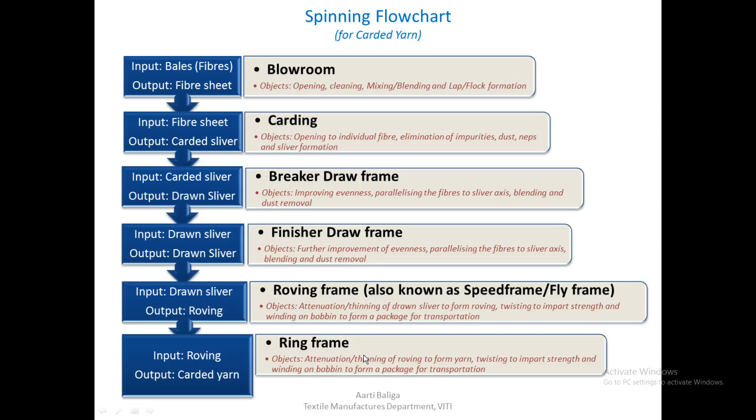The last thing that needs to be done is it needs to be wound onto a suitable package for transportation. Now when I say transportation, it means that we need to take this particular roving and feed it to the ring frame. So a suitable package has to be made, which cannot be a can, and therefore a bobbin is used here. So let us see this roving frame.

It is called a necessary evil. Let us see why it is called so.

A roving frame is necessary because if you see the draw frame sliver, which is around 0.12 hank, which you need to convert to a yarn of say 60s count, then approximately one would require a draft of around 300 to 500 in between. And this kind of a draft is quite high, and one cannot have this kind of draft on one single machine.

So only the ring frame would not be able to provide this high level of draft. Since it's not capable of high drafts, we will need one more machine, and that would be a roving frame in between the draw frame and the ring frame.

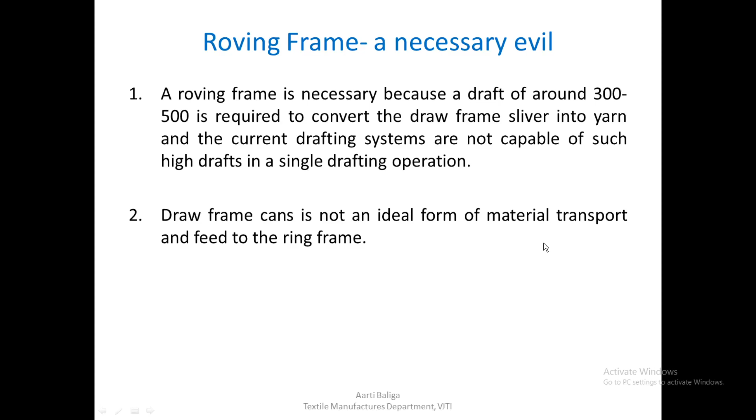Also, the second reason is that draw frame cans are not an ideal form of material transportation, and neither is it an ideal form of feed to the ring frame. So in spite of all efforts that have been made to eliminate this process, due to the above two reasons, it remains without any success.

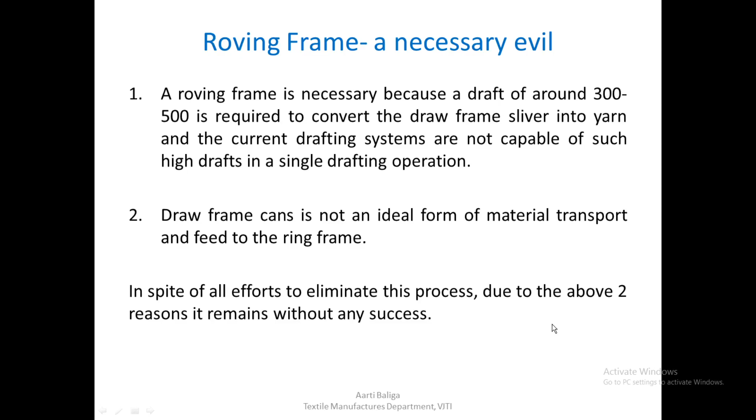So let us see what are the demands placed on a modern roving frame. If the roving frame has to be used, then the efforts must be directed towards the following. Since the roving frame is a necessary evil, that means I just cannot avoid it. So at least if I cannot avoid it, let us see what it should be doing, so that it will be a little bit beneficial in the process.

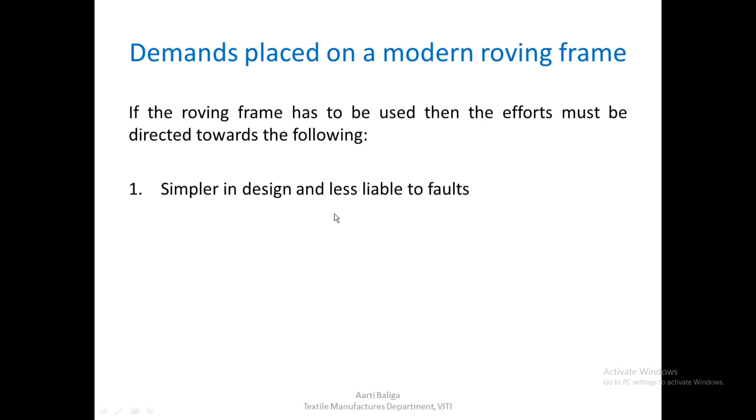It should be of a simpler design if possible, and it should also be less liable to faults.

It must have increased spindle speeds, so that I get a good efficiency and good production levels.

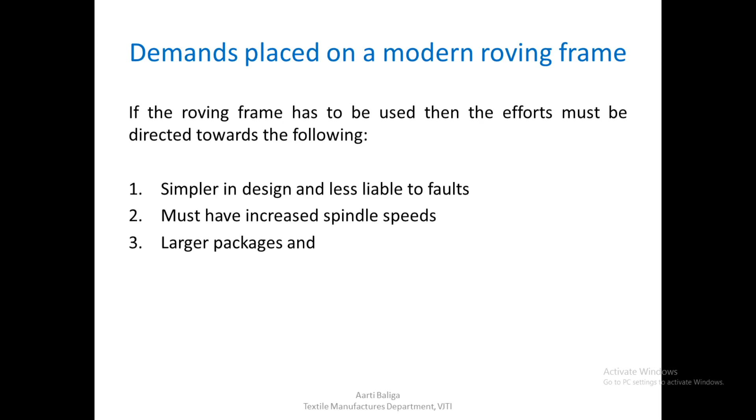Then one must try to get larger packages, and also if possible some amount of automation in both machine as well as during transportation would be good, in terms of making use of this roving frame, since anyways one has to use it. All this must be achieved without any increase in production costs. This would be an ideal condition where we have all these four conditions met, and that too with no increase in real production costs.

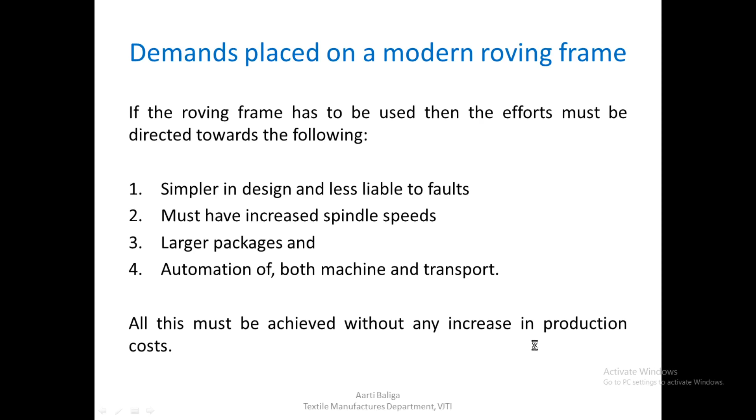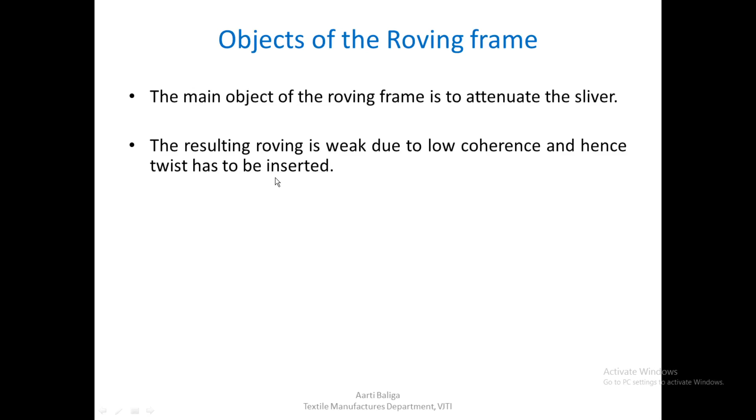So let us see the objects of a roving frame. The main object of the roving frame is to attenuate the sliver. The resulting roving is weak due to low coherence, and hence twist has to be inserted, and this twisted roving has to be transported in a form of a suitable package to the ring frame, and therefore is wound onto a roving bobbin. So three basic objects: making a roving, twisting, and then winding it. So drafting, twisting, and winding.

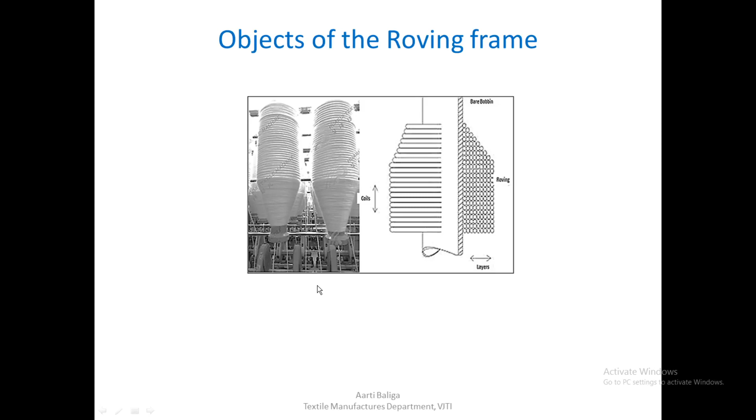So let us just go a little bit ahead and see. This is the image of a roving bobbin, and this, if I were to take a cross section of this, is how the bobbin would look. The layers of roving are laid in this manner, one layer on top of the other, and this is how the bobbin is made.

The winding operation was the operation which made the old roving frame gearing really very complicated.

In modern roving frames, motors have replaced whatever complicated gearing was there in the old roving frames, like differential gears and building mechanisms. All these are being replaced in the modern roving frames.

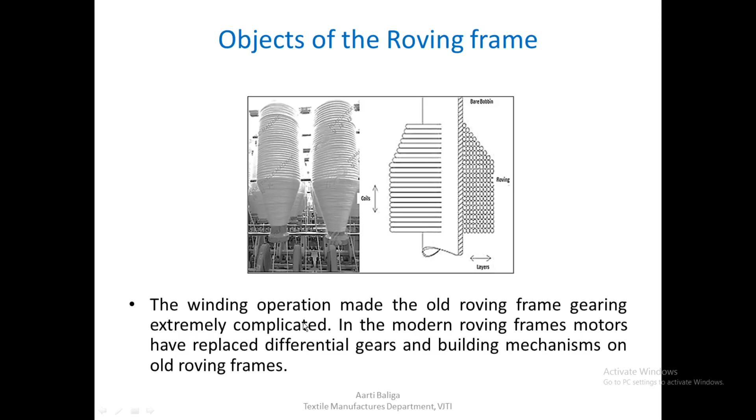So to understand any of this, we should understand why this winding operation is so very complicated, so that it makes the gearing complicated. Let us try and understand what really makes winding on a roving frame so complicated.

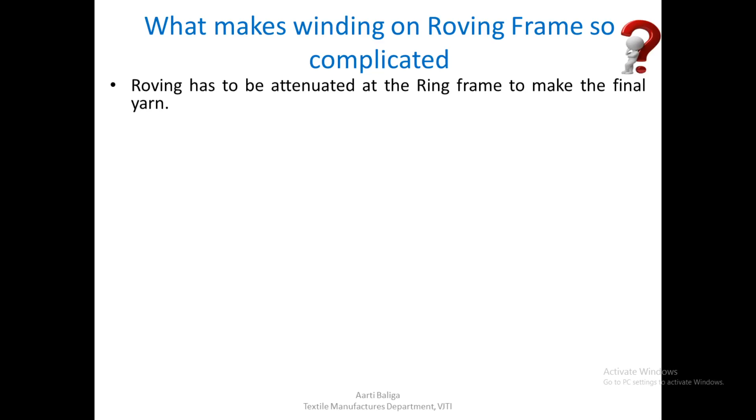Roving has to be attenuated at the ring frame to make the final yarn. So this is for sure that to make a yarn, I have to make a roving. The twist inserted at the roving frame must not be so high so as to pose a problem during drafting in the ring frame drafting system.

One must take care that the twist inserted, although necessary to impart some strength in the roving because it has become thinner and weaker, must not be so high that it creates a problem in the ring frame. Again, in the ring frame there is a drafting system which will have to open out and draft this roving to form the yarn, and therefore too much twist is not advisable.

The twist must only be sufficient to allow the roving to be easily unwound on the ring frame without breakages. So if we make a roving and form a bobbin out of it, when this bobbin goes on the ring frame, it should be possible that the roving is unwound from it without breaking.

So we can conclude that an optimum twist has to be inserted. That means the twist inserted should not be too low, so that the roving is still weak, or too high, so that it creates a problem in the ring frame. It should be an optimum amount of twist inserted at the roving frame.

Now, since the roving is low in twist as well as strength, the tension on the roving must be as low as possible. If I'm able to reduce the tensions that the roving might face in its next process, I would be able to insert lower twist at the roving frame, which would be an ideal condition. The tensions during unwinding must therefore be as low as possible.

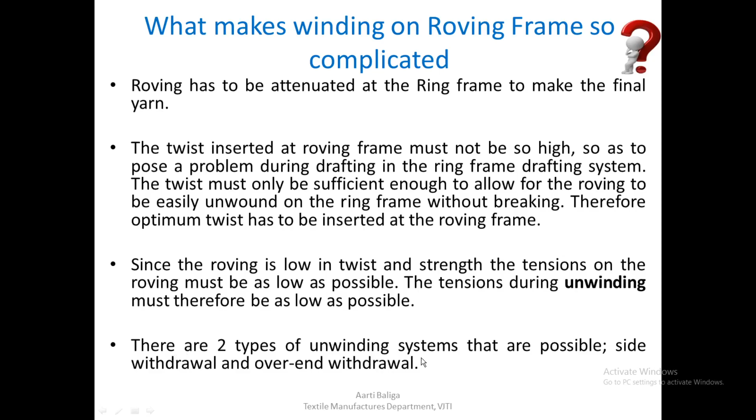So how do we ensure that the unwinding tensions are low? For that we need to understand a little bit of winding and unwinding systems. There are two types of unwinding systems possible: side withdrawal and over end withdrawal. Let us have a look at them.

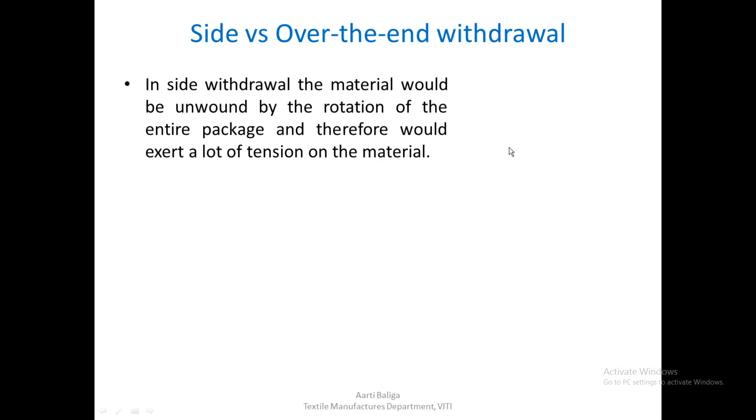What do I mean by side withdrawal? In a side withdrawal, the material would be unwound by rotation of the entire package and would therefore exert a lot of tension on the material. This is how it looks: a bobbin with flanges on both sides, and whatever material is wound, if I need to unwind it, this entire package needs to rotate, as shown in the diagram.

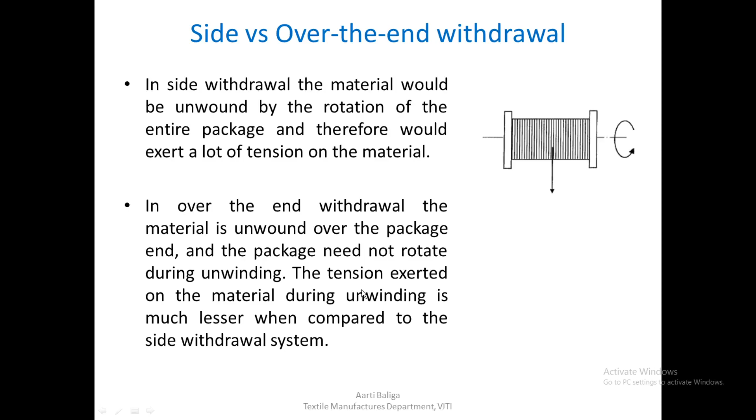So what is the other kind of withdrawal system? That is the over end withdrawal. In over end withdrawal, the material is unwound over the package end, and the package need not rotate during unwinding. Since the package need not rotate, it exerts minimal tension onto the material getting unwound, much lesser compared to the side withdrawal system.

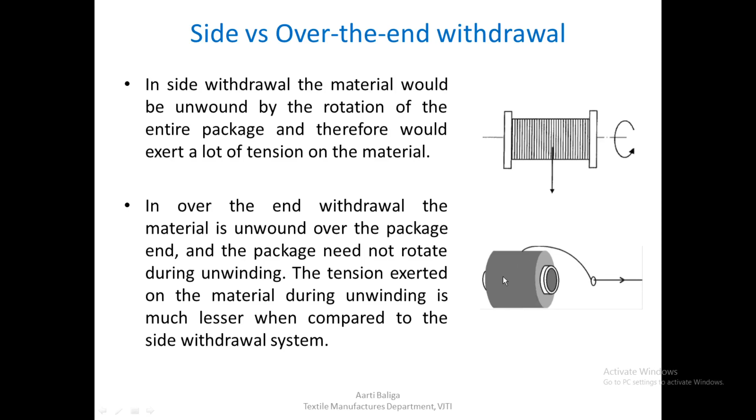This is how the over end withdrawal looks like. There are no flanges, and the material just comes over the end instead of as in the earlier case. The package need not rotate during unwinding, and this kind of withdrawal would be ideal for a roving, which is rather weak.

So, regarding over the end unwinding and the shape of the roving bobbin, let us try to understand this. The over end type of unwinding would be more suitable for roving, since it is weak, as we have already seen, due to the low insertion of twist.

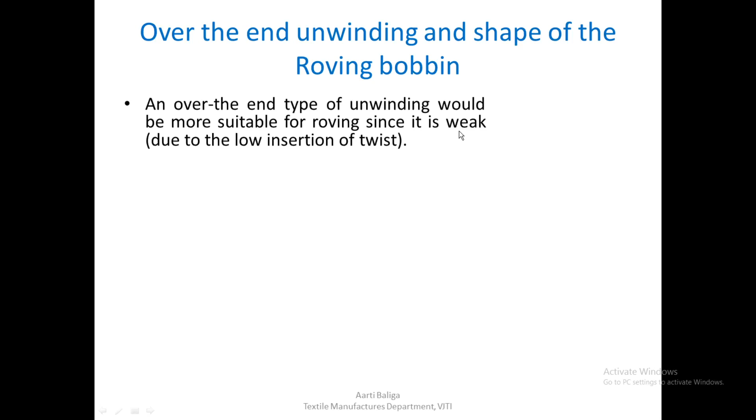But the over end unwinding does not pose a problem when the material is a yarn. Such packages, where over the end unwinding happens, are more popular in case of yarn, because when yarn is wound on such a package, the hairiness of the yarn causes the coils to hold onto each other, so there are fewer chances of slough off.

Now what is a slough off? It's a package defect where the coils of yarn come off the package in bunches. So if I were to use this kind of over the end unwinding for roving, it would not be ideal because most of the coils would just come off as a slough off.

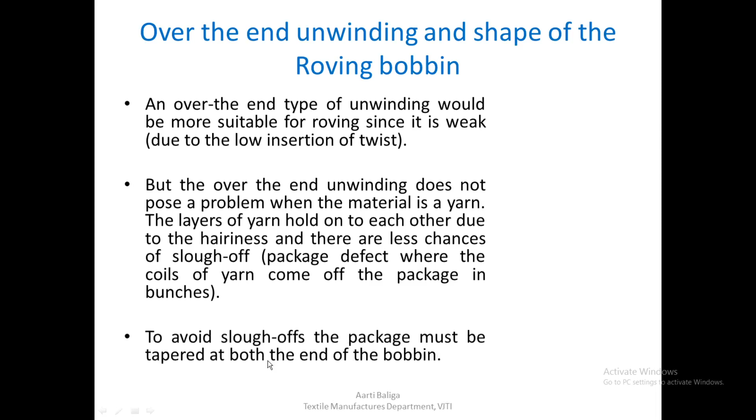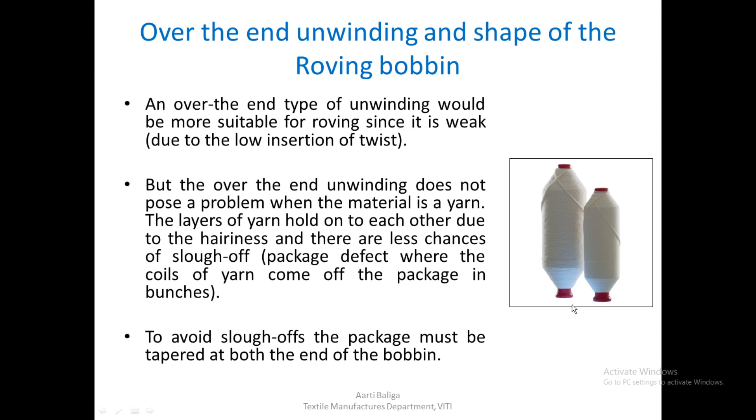From the side or the ends of the bobbin. So to avoid slough off, the package must be tapered at both ends. In case of a roving, we need to make a special shape here. Although I want an over the end unwinding, I do not want slough offs. So we build the package with tapered ends on both sides, which ensures that slough offs do not happen.

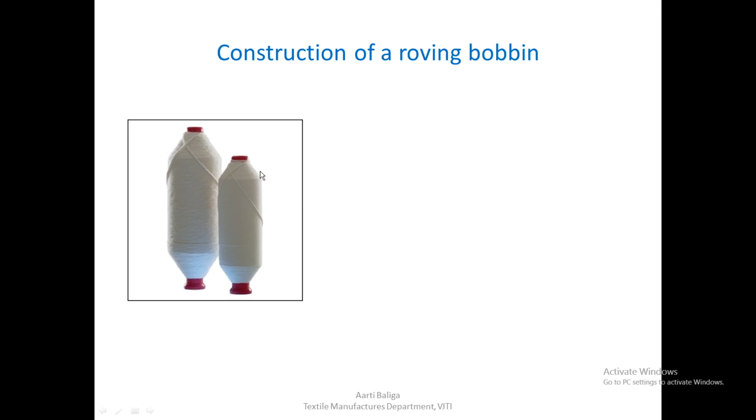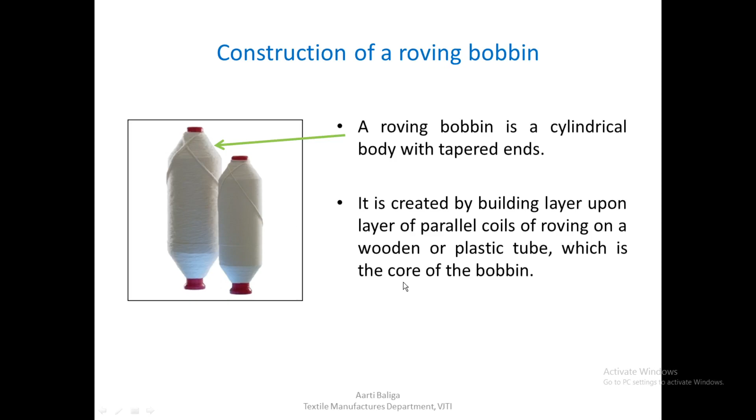So let us look at the construction of a roving bobbin in a little more detail. This is the image of the roving bobbin. It is a cylindrical body with tapered ends, as we have seen. This is the taper on the ends. It is created by building layer upon layer of parallel coils of roving on a wooden or plastic tube. The center is this plastic or wooden tube on which the coils are laid one on top of the other, and that tube forms the core of the bobbin.

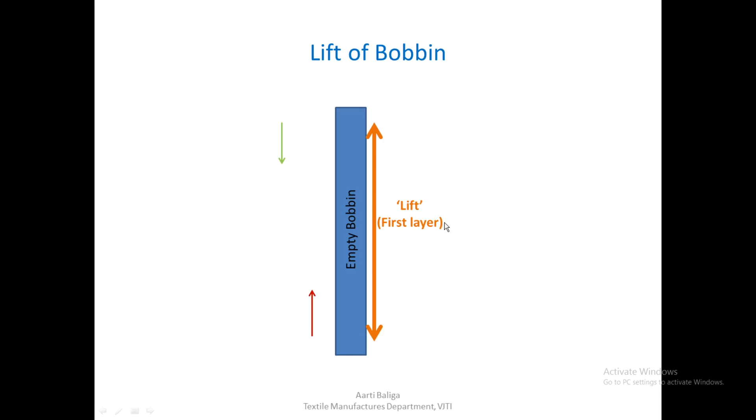So let us see how these layers are built. This is the lift of the bobbin. If this is the empty bobbin, the lift would leave some area at the top and bottom. If the first layer is wound from bottom to top, this red arrow shows how it goes. This is known as the lift, the first layer being laid, meaning the coils are laid from the bottom here and you reach the top.

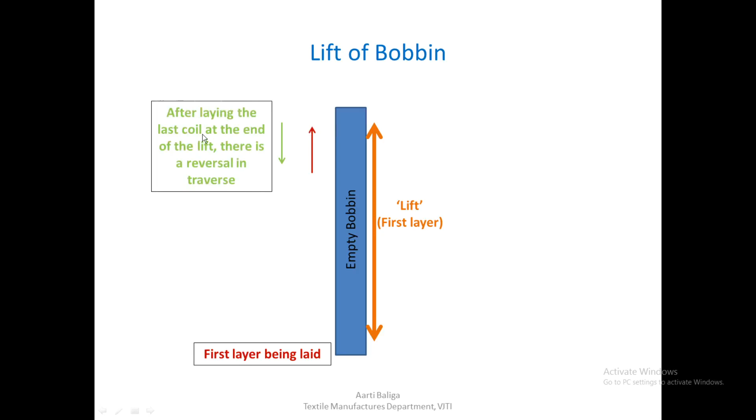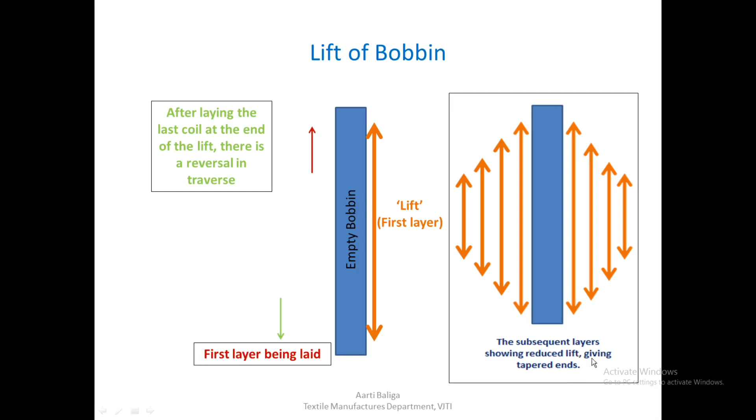Once you reach the top, after laying the last coil at the end of the lift, there is a reversal in the traverse. This green arrow shows the reversal, so the coils are laid again as you come towards the bottom of the bobbin. This keeps on happening. So this is the first layer being laid, with a lift of say this much. As you go to the second layer, the lift has to be reduced, and so on till the entire bobbin is built, so that we get a tapered end on both sides. The subsequent layers showing reduced lifts give us the tapered ends.

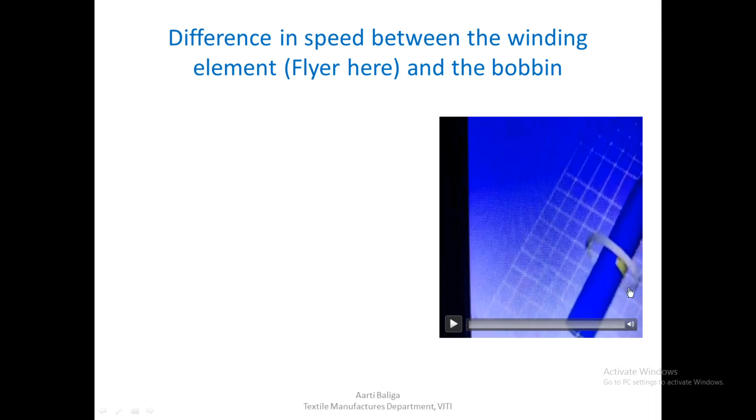So what is the difference in speed between the winding element and the bobbin? Let us see why we need this kind of difference. The winding element in case of a roving frame would be a flyer. Let us look at a small animation here. We can treat this as a bobbin, and there is a winding element which is winding this material or tape onto this empty bobbin.

We can see that the winding element is rotating around the bobbin to wind whatever material we need. If you observe closely, the bobbin is stationary, it is not rotating; rather, the winding element is having a rotatory motion. Now, instead of this, what if the bobbin also were to rotate in the same direction? In that case, we would end up with no winding.

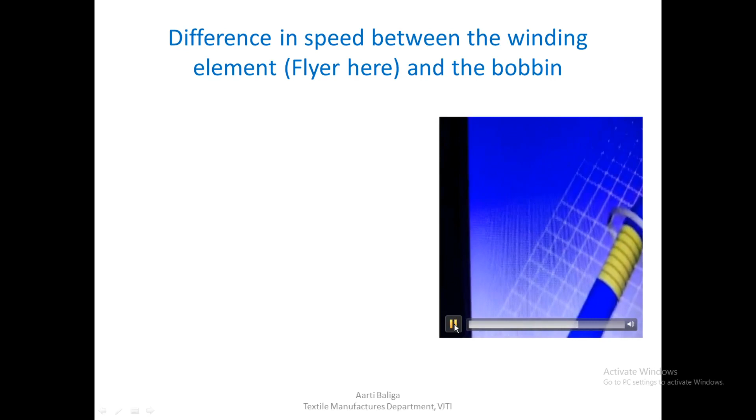If at all we have to give some rotatory motion to the bobbin, we must ensure there is a difference in speeds between the winding element and the bobbin, so that some amount of winding happens. We'll continue with this animation to understand the concept. So there are two elements involved in winding: the one that is winding, which rotates, and the one on which material is being wound, the bobbin. Given these two elements, either one of them must be stationary. In this case, the bobbin was stationary.

Either it can be stationary, or one of them should be faster than the other for winding to take place. So it is obvious that if the speeds of both these elements are equal, then there shall be no winding.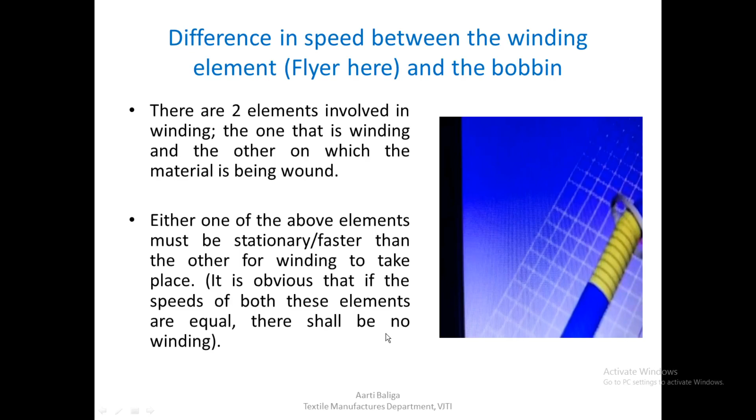So with this concept in mind, we must understand the speed of the flyer and the bobbin. Since flyer is the winding element and the bobbin is the element on which the material is being wound, we are sure there should be some speed difference between the flyer and the bobbin. The only question remains is whether the bobbin will be faster than the flyer or the flyer faster than the bobbin. In either case, winding will happen, but we must make a choice between these two kinds of systems.

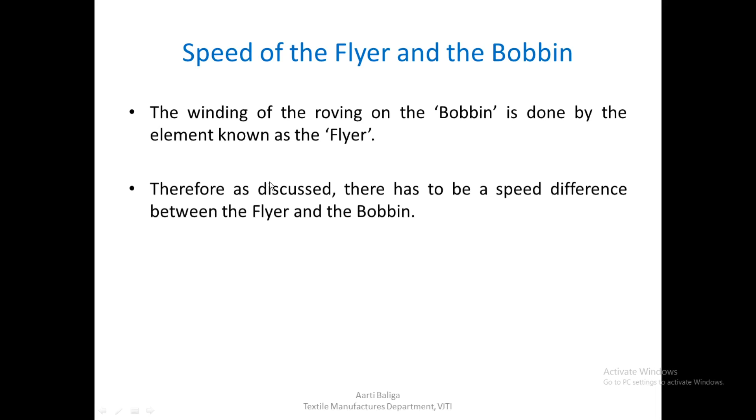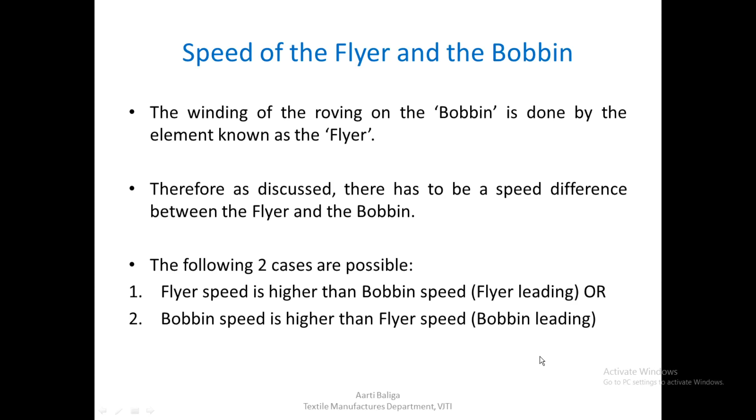The winding of the roving on the bobbin is done by an element known as a flyer. Therefore, as discussed, there has to be a speed difference between the flyer and the bobbin. The following two cases are possible: flyer speed is higher than the bobbin speed, known as flyer leading, since flyer speed is higher. Or there could be a second case where bobbin speed is higher than the flyer speed, known as bobbin leading. By analyzing these two cases, we should decide which system would be more ideal to work with.

Let us first see the flyer leading type, where the flyer speed is higher than that of the bobbin. Let us assume some numbers here. Let the front roller delivery rate be pi dn. This is the surface speed of the front roller, and let us say it's a constant number, because whatever delivery is happening by the front roller is always constant. That constant material, say in inches per minute, needs to be wound onto the bobbin.

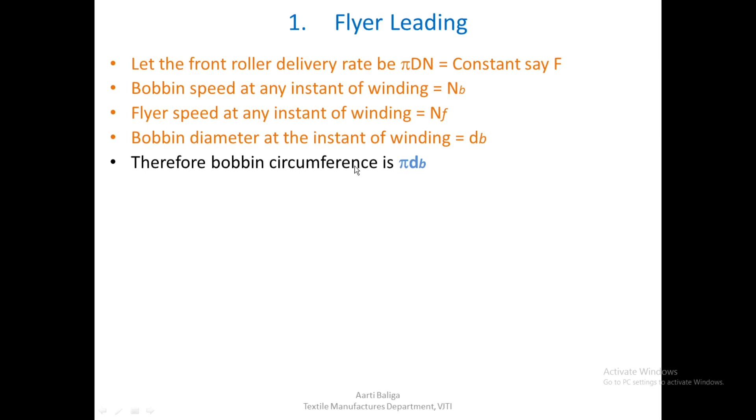For this we know that bobbin speed, let us say it is nb, and flyer speed at the instant of winding is nf. Let bobbin diameter at the instant of winding be small db. So with these representations, let us go ahead. Therefore the bobbin circumference at this instance would be pi into db, if db is the bobbin diameter.

If we were to form an equation, we know that whatever material is delivered by the front roller has to be equal to what is wound onto the bobbin. So if the material delivered is F, then it has to be equal to pi into dB into n, that is pi dn for the bobbin. Here the n would be the difference between the flyer speed and the bobbin speed. Since flyer speed is higher in case of flyer leading, we write it as nf minus nb.

In the above equation, the front roller speed, pi, and the flyer speed would all be constant. Flyer speed is always constant. Therefore, since the LHS is constant, that is F is constant, on the right hand side, as the diameter of the bobbin increases, only this will be variable and will keep increasing. So to keep this constant, we need to reduce this particular bracket, meaning NF minus NB must reduce.

Since the flyer speed in this bracket is a constant number, for this bracket to reduce, we can obviously see that NB must increase. So this is the conclusion of the flyer leading case: as the bobbin diameter increases, the speed of the bobbin must increase.

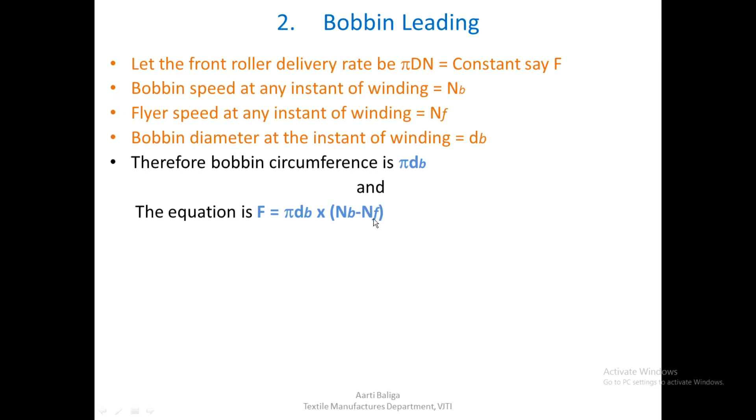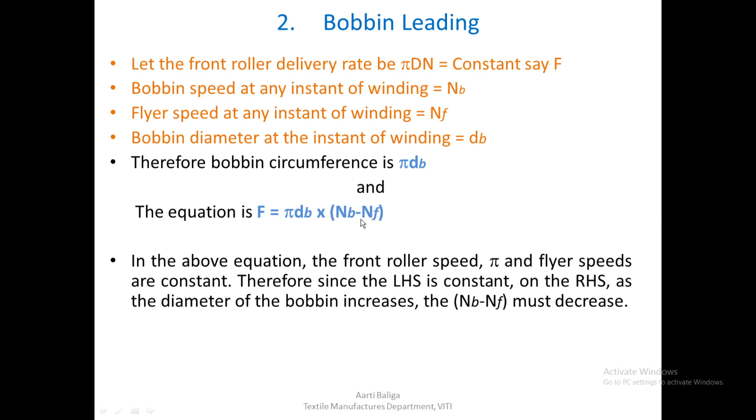In the above equation, the front roller speed, pi, and the flyer speed are all constant. Since all these are constant and LHS is constant, as dB increases, this bracket must again decrease. But with a slight difference here, since the flyer speed in this bracket is constant, for this bracket to decrease, NB also must decrease.

So in conclusion, in case of bobbin leading, we find that as the bobbin diameter increases, the speed of the bobbin must decrease. So these are the two cases that we now have. In the next slide, let us try and compare both of them.

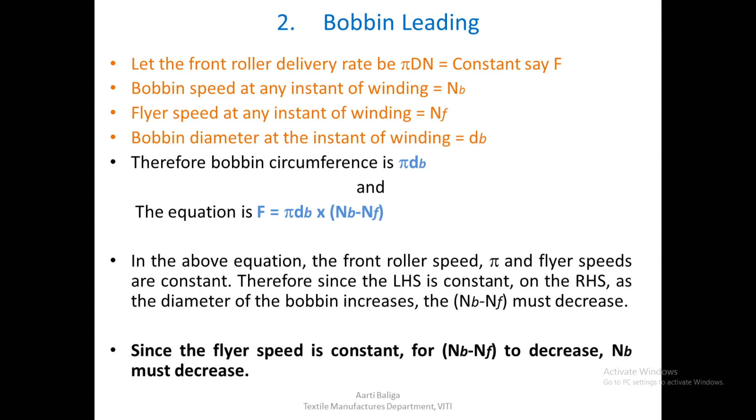Flyer leading versus bobbin leading. In the flyer leading case, the flyer speed is going to be constant, and as the bobbin diameter increases, the bobbin speed will need to increase, as we have just seen in the earlier slide.

In the case of bobbin leading, the flyer speed always remains constant, but bobbin speed is higher than the flyer speed, and therefore as the bobbin diameter increases, bobbin speed decreases. This we have proved from the earlier slide and the equations that we have seen.

So these are the two cases that we have. Now we must try to conclude for ourselves which case is more ideal for us.

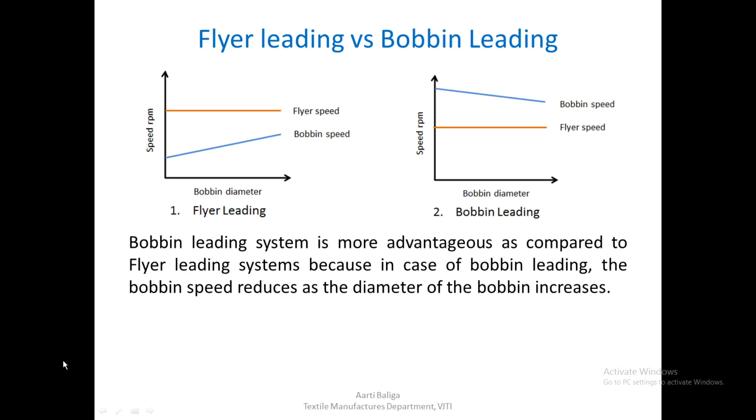Bobbin leading system definitely would be more advantageous as compared to the flyer leading system, because in bobbin leading, the bobbin speed reduces as the diameter of the bobbin increases. It is obvious that as the bobbin diameter increases, it becomes heavier in weight, and it would always be advantageous for us to decrease its speed rather than increase, because if we decrease the speed, it will require lesser effort on the part of the machine, leading to some saving in energy consumption.

So as the bobbin diameter increases, reducing the bobbin speed would be a more ideal condition for any machine to run. So we go with bobbin leading. We shall see that all the modern roving frames are based on the bobbin leading principle, so flyer leading is not at all used.

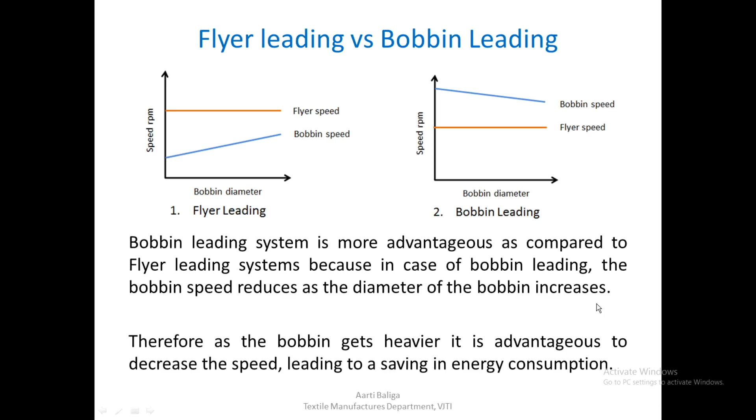In case of bobbin leading, bobbin speed is always higher than the flyer speed. Flyer speed is constant, and bobbin speed is higher, and as the bobbin diameter goes on increasing, we need to reduce the bobbin speed. That means layer by layer, as the bobbin is being built, we need to reduce the bobbin speed. This is one thing we need to keep in mind as we go further on.

So, requirements for building the roving bobbin. To build this particular bobbin, what are the requirements? The bobbin speed has to reduce for winding as the bobbin is being built up layer by layer, that we've just concluded.

Then the second thing is that after the first layer is wound, the traverse has to come back. If the flyer has reached the end from bottom to the top, it has to return to the bottom, and then again move upwards and downwards. Rather, in the roving frame, the flyer is not moving up and down; the bobbin rail moves up and down, and the coils are laid from bottom to top, and subsequently top to bottom, and so on until the entire bobbin is built up. So the flyer that lays the roving on the bobbin, or rather the bobbin, is reversed every time it reaches the end of its lift.

To form the tapered ends, once we have decided that the bobbin speed has to reduce, and the bobbin has to reach the end of the traverse and reverse every time, we also need to keep in mind that to make these tapered ends, the height of the lift must be reduced after every layer that gets completed. So there are three requirements for winding this roving bobbin, which need to be fulfilled to get this shape of the bobbin.

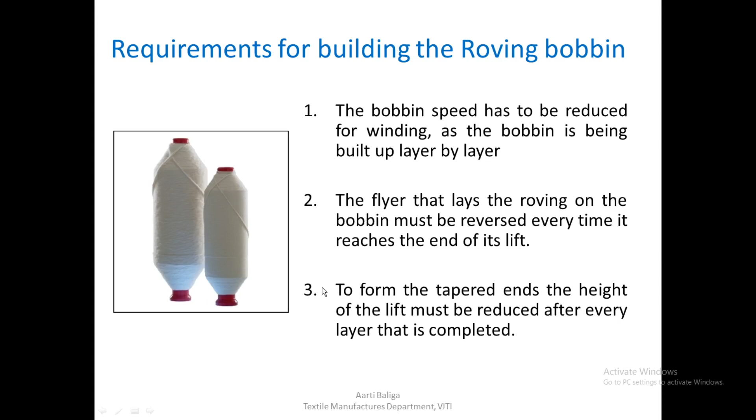So in our coming lectures, we shall see both conventional roving frames as well as modern roving frames from the point of view of this basic requirement, and how the gearing has changed over time to make the entire mechanical system much less complicated, and make it much easier to build up this particular roving bobbin.

So with this, we come to the end of this particular lecture. Thank you.